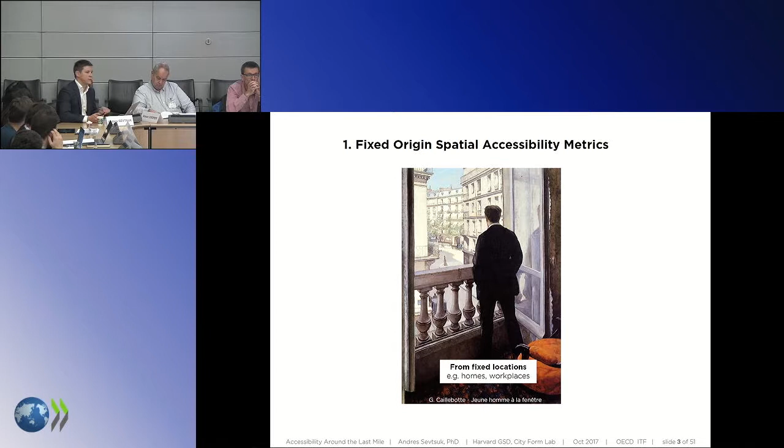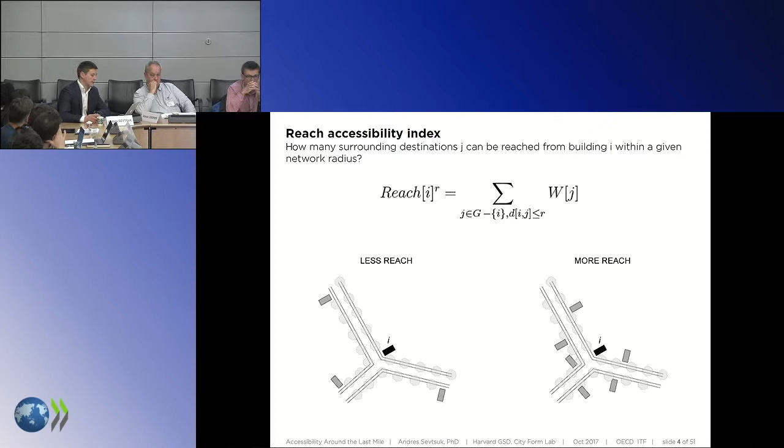I'll start by describing the fixed origin metrics, some of which have been measured and mentioned in the previous sessions already. Something like a cumulative opportunities index, which simply counts how many destinations we can get to, would, for instance, quantify how many destinations of any character are found within a certain walk range or transit time range. So this is, for instance, how many households or how many buildings, to be precise, are around a certain destination, like a coffee shop in an urban environment.

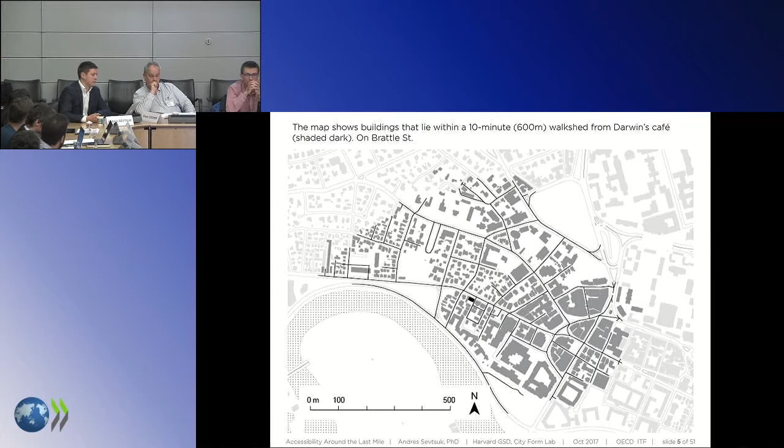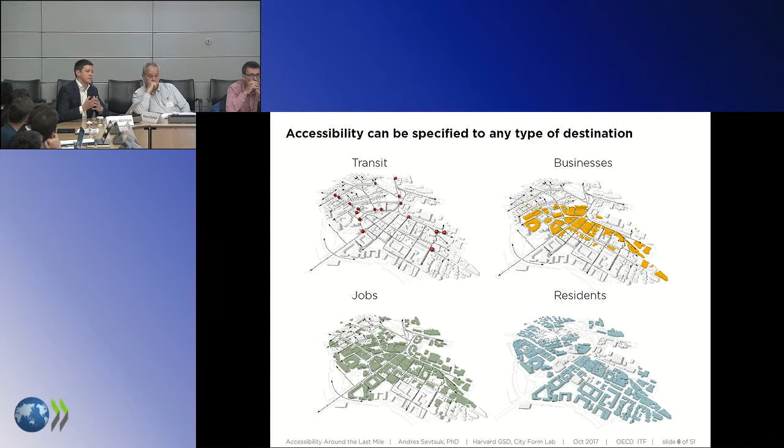This can be expanded to any type of destinations, of course. We can measure cumulative opportunities access to transit, businesses, jobs, residents, businesses of a particular type, residents of a particular type, and so on. And we can do it at all scales.

In this map, we use a cumulative opportunities index to measure across the United States, in all cities, how many people are found within a walk distance of a retail cluster. We did this analysis in all cities using all retail clusters around the country, and for instance detect that in New York City, across 5 boroughs, 88% of the population is within a kilometer of a retail cluster, and the cluster here is defined as an agglomeration of at least 25 stores.

And if you're in Memphis, it's only 6%. On the map on the right-hand side, what black and white areas differentiate is areas that we consider to be urban versus suburban, and urban has a certain density cutoff.

With these sorts of indices, and as I think has been emphasized over and over again, what's really attractive is that they're very easy and clear to communicate. It's very easy to tell somebody that, look, 88% of the population in the city is within a walk range, and the walk range here is 1 kilometer or about a 15-minute walk.

This could lead to really interesting policy applications too. So for instance, we did the same analysis for transit access across the entire United States, and we found that across the US, only 7% of the whole population lives within a walk distance from a transit station. This only considers rail transit, so it doesn't consider bus. At the same time, about 15%, or double that rate, is next to a retail cluster within a walk range.

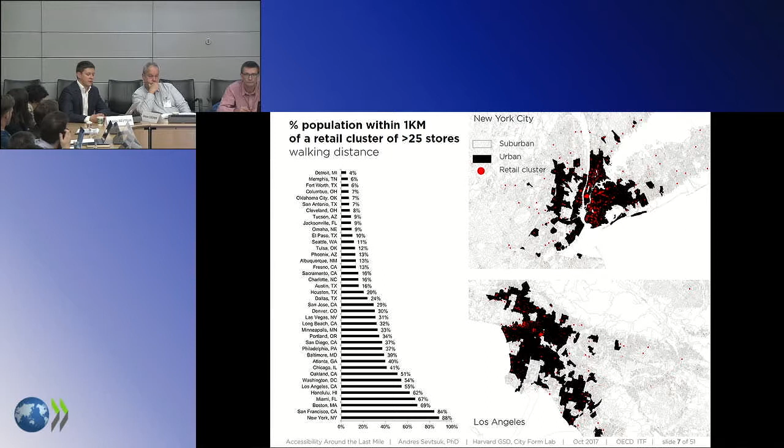So it kind of evoked this idea of amenity-oriented development, where in places in suburban areas, especially where transit is lacking and nowhere in sight to be built, could we use this idea of trying to incentivize development to be close to amenity clusters, such as retail agglomerations or mixed-use service agglomerations, as a benchmark to incentivize more development around those. This slide also shows the cities that perform well or low on this axis.

To calibrate such an index, you generally need origin points, destination points, optionally weights to describe what the destinations are, and some sort of a search radius parameter. The gravity type accessibility indices invented by Hansen in the 1950s are extremely popular, and I would argue somewhat more precise if we really want to talk about the notion of accessibility, because they also take into account the travel costs of getting to the destination.

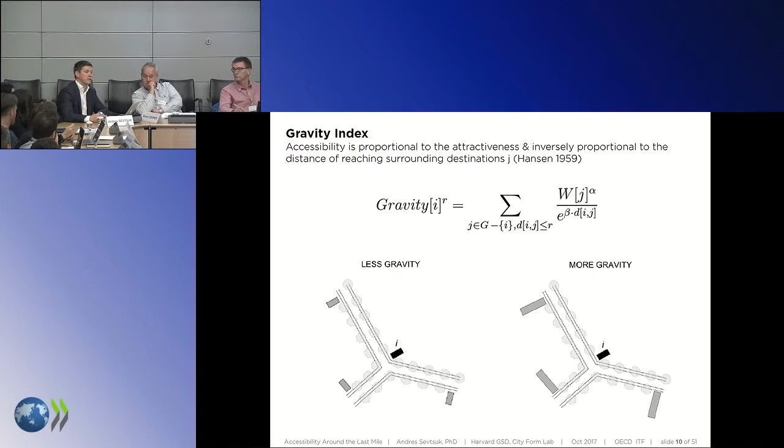So the destinations that are next to us are weighted much more importantly than the destinations that are at the edge of the search radius we're looking for. Of course, the downside is that the result is a ratio and an index that's very hard to intuitively explain to a policymaker. What does it mean to have an index of 0.75 versus 200 jobs within a 5-minute walk?

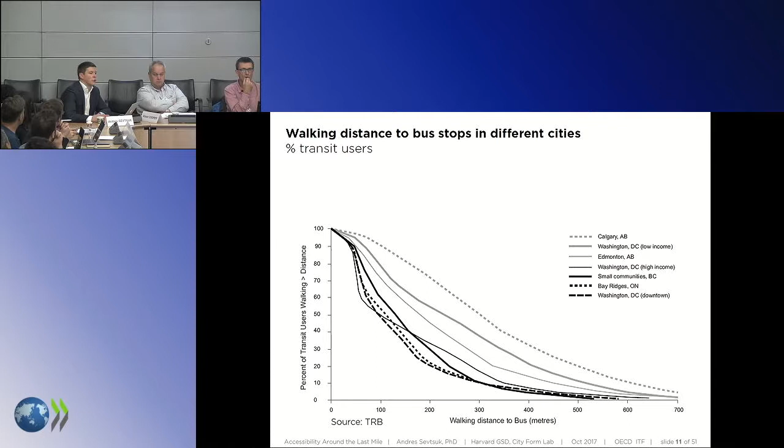And in different cities, the decay rate that is applied in the gravity metric can differ. This graph here shows a TRB study where they measured the percent of people walking to transit in different cities. As you can see, the decay rate differs by type of city, but also by income. The top line is, for instance, Calgary, and the solid black line is, for instance, small communities in British Columbia. People are more sensitive to longer distances there.

But we can calibrate this empirically by looking at a travel survey in a town, or conducting a small survey at transit stations and asking people how far you came from, and get a sense of what the distance decay rate is for that town.

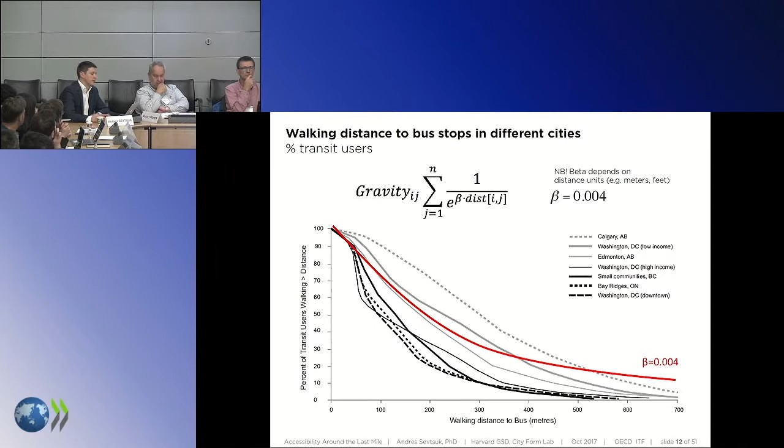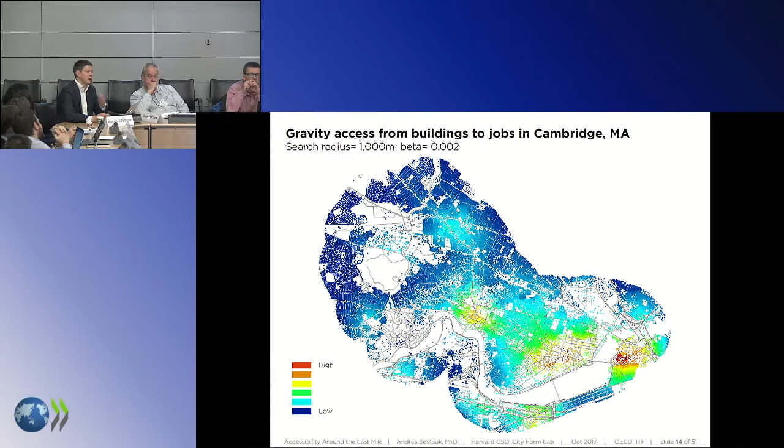We can do the same thing for access to jobs, for instance, and we detect from every building how easy it is to get to jobs in town. This affects also the likelihood of people who live in town to walk to jobs. In Cambridge, the mode share of walking to work is actually very high—it's around 30% of people who actually walk to work rather than riding transit.

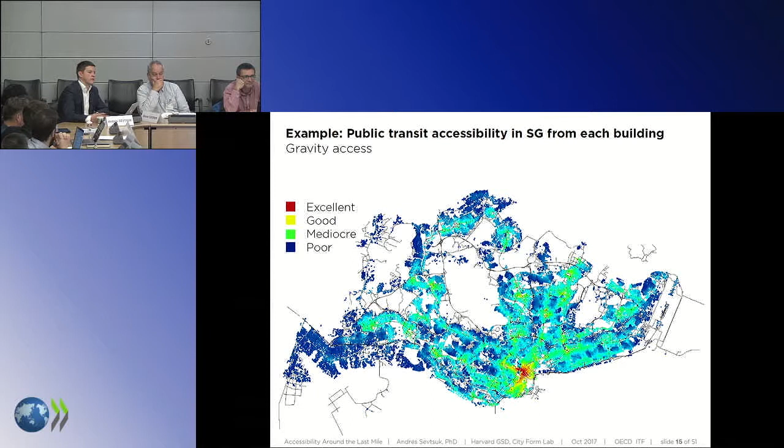This is another example of citywide transit accessibility at the individual building level. This is in Singapore, where there are considerably many more buildings, and we also weighted the analysis by the level of service at each transit stop. And this, again, can be done for each address point individually.

Now, the user inputs for gravity metrics again require origin points, destination points, optionally weights to describe the destinations, a search radius, but also on top of that, a distance decay parameter beta that tells us how the likelihood of going to destinations drops away with distance. And this needs to be empirically calibrated.

What I'd like to first emphasize before moving on is what are the key planning and built environment features that affect either of these metrics. I've talked about the cumulative opportunities metric and the gravity metric. So what could make a difference in upping that metric in different environments? First, if it's cheaper or easier to move to the destinations, if we have transportation options available from a building to a destination, we can access more destinations, as I think Simon's presentation very clearly demonstrated in London.

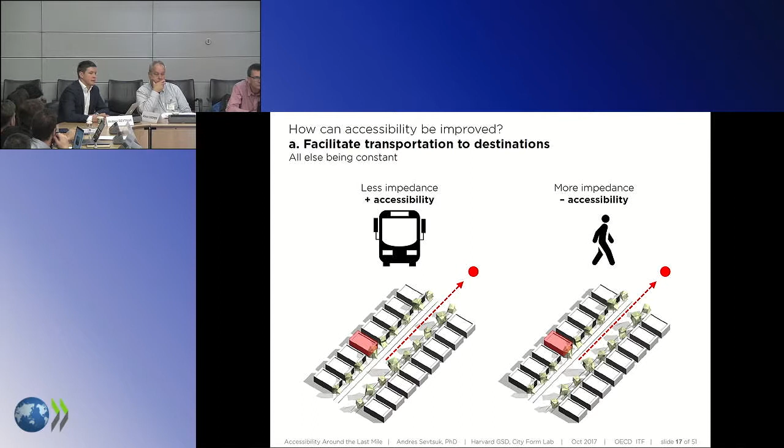But there are three other ways of increasing accessibility. If we increase the density of destinations around the locations, the index would naturally also bump up. If we increase the capacity of the destinations around the location, the index would similarly bump up. And finally, irrespective of the mechanized modes of transportation, if the built environment were more connected around us, then we get to more destinations.

If you have a hospital on a highly connected street intersection where many streets lead to it, it has higher accessibility than if it's in the middle of a block, irrespective of mechanized transit modes. We can sometimes see a 50% difference even within neighborhoods—corner properties render access to about 50% more people than properties in the middle of the block.

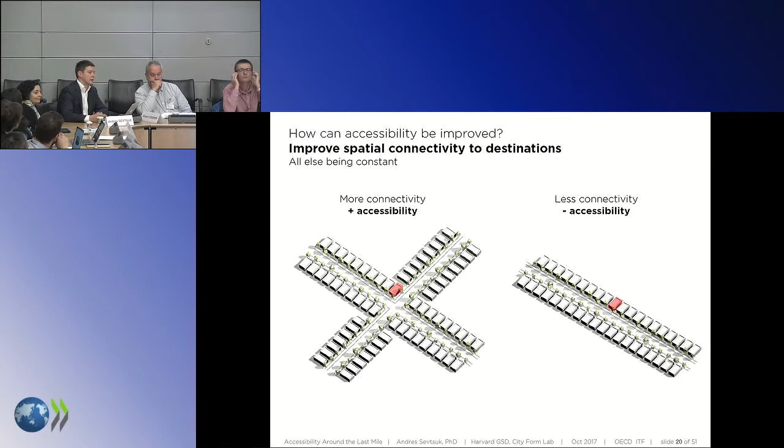But then there's the question of how we'd measure accessibility to destinations if we no longer assume people come from a fixed location like a home or a job. How could we take the attribute weights of those origin locations and simulate people moving through a city? Transportation modelers have long tackled this, simulating every person as moving through a city during the day, engaging in activities from any point along those trajectories.

But in accessibility studies, this is oftentimes ignored. Most of the time, we assume people come from homes, every once in a while from jobs, but not very often while moving around the city. So we've tried to tackle that by introducing new tools in the urban network analysis toolbox that help model accessibility at the pedestrian scale.

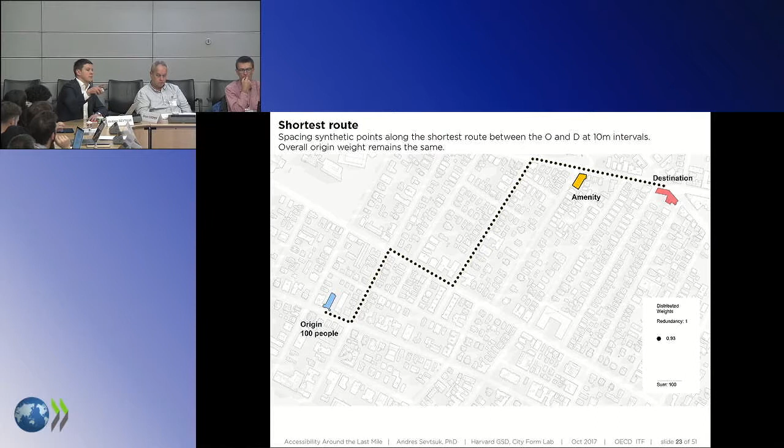So we've proposed a metric based on the betweenness centrality index known in network analysis and graph theory, to redistribute weights from origin points to destinations to simulate foot traffic on streets at the pedestrian scale. We don't assume people necessarily walk the shortest path, which actually turns out doesn't happen very often—pedestrian studies find we often take longer routes, around 15-20% longer than shortest routes.

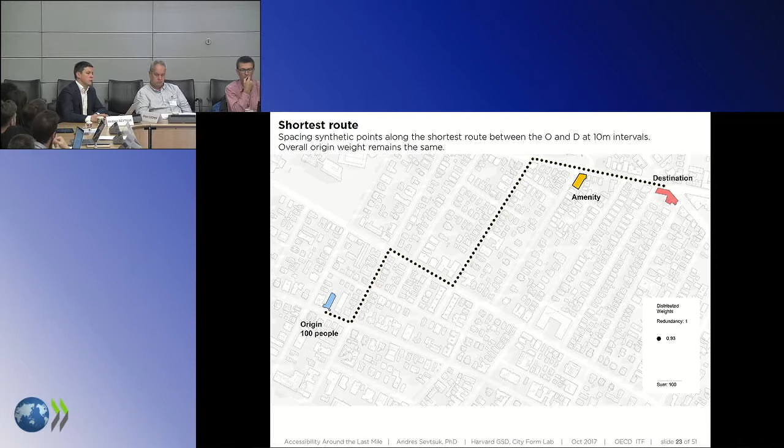So the tool we developed also allows us to model all probable routes. If we have, say, 100 people starting at the origin, the same 100 people finish at the destination, but along the way there's a different probability distribution of which routes are more likely. In this case we assign equal probability to every route, but since segments overlap—about 64 routes here—those overlapping routes attain higher probabilities.

We take the weight of the original building, which is 100, and every point along the way gets a fraction of that weight, such that the sum across all points still equals 100. So we're not inflating the number of people assumed to be on streets—we're simply redistributing it from one single point to many points on streets to simulate that effect.

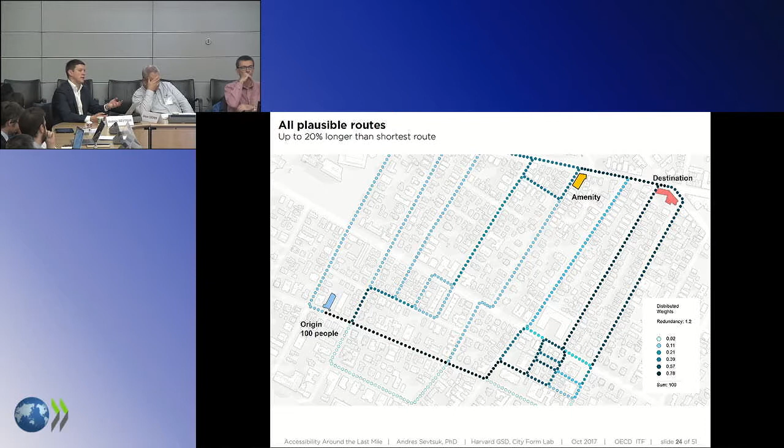This is a way to model lots of trips in an urban environment from certain locations—like going from tube stops or subway stops to office buildings in the mornings, or from offices to subways, or subways to homes in the evenings, or daycares, and all sorts of different trip destination matrices.

To do this weights distribution, we need origin points and destination points. Optionally, we weigh the origin points—for instance, characterizing how many people start those trips. Then we have what we call observer points, distributed points on the network that capture the weights redistributed from the origins. And of course there's a radius parameter, which can be scaled up.

So I'd like to use this opportunity to demonstrate how changing the assumption of where trips start can change how we plan things in a city, and what seems like a reasonable proposal for facility locations.

The first example comes from Singapore, and I'll show you a second example from a context of Indonesia. This project was a collaboration with the Singapore Housing Authority, where my lab, the City Form Lab at Harvard University, was involved with developing a new planning norm for commercial facilities in Singapore's housing towns.

The housing authority, because they're so vast—in Singapore about 83% of the population lives in public housing—therefore also has to cater to commercial needs. So they actually plan commercial environments as much as they plan residential environments, tackling the problem of how to do that, where to put them, and what typologies of buildings to propose.

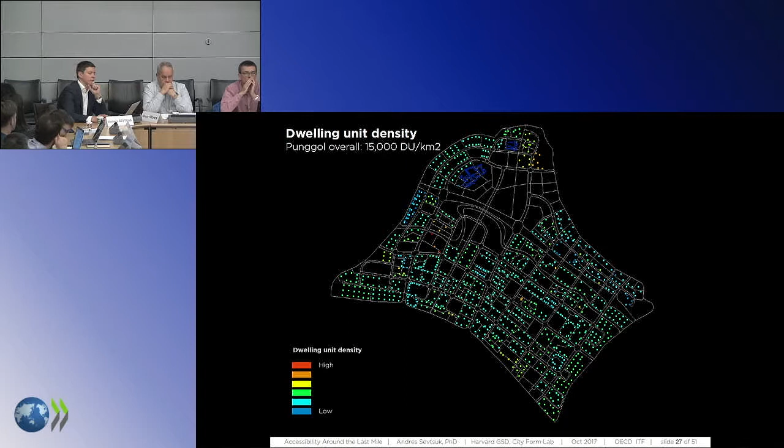This town has about 300,000 inhabitants. It's a big district of Singapore called Punggol. The transit stops fall into three categories: there's one single metro stop in that area, light rail stops, and bus stops, which are blue. Light rail is green.

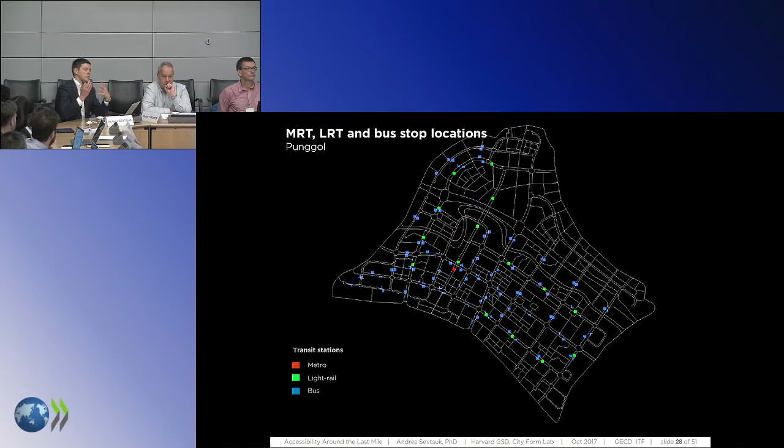We calibrated a model that applied a certain probability to households to walk to each of those destinations depending on what was available around their house. So if the tube stop was available close by, most trips would go to the tube. But if there was no tube stop within, say, an 800 meter cutoff, trips would be allocated to light rail or bus. The balancing was based on an assumption matrix of how many trips would go where depending on how far these destinations are.

That essentially led to an estimation of the same 300,000 people in that town, now visualized or mapped according to their daily commute trips. In Singapore, 84% of the population uses public transit to get to work, so it's the most important travel mode, and these trips can be assumed to happen across different social groups.

Now, if we think that these are our origin points for planning facilities rather than the home fixed locations, we actually come to a very different plan for planning the facilities. If we don't put the retail centers, the food courts, the convenience stores into locations necessarily right next to people's homes, but rather right next to where they walk on a daily basis, it turns out we actually capture much more demand.

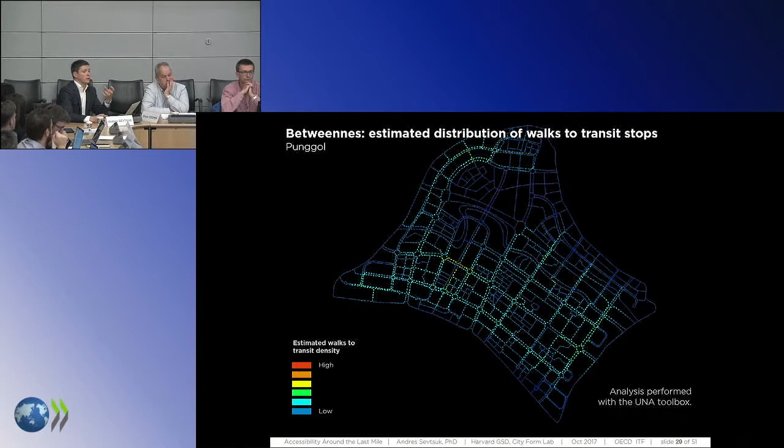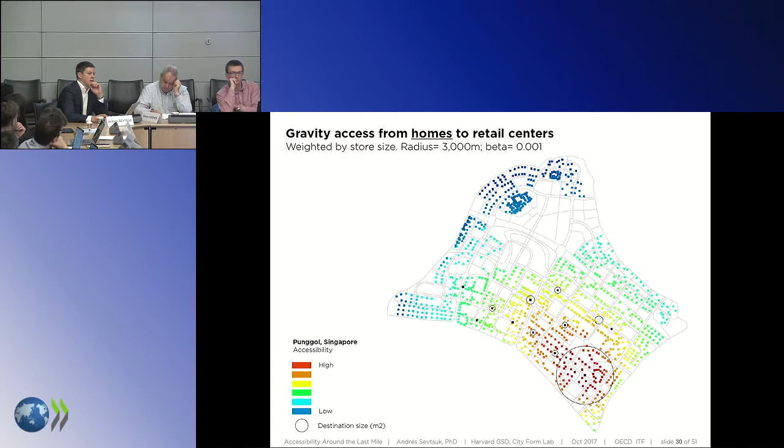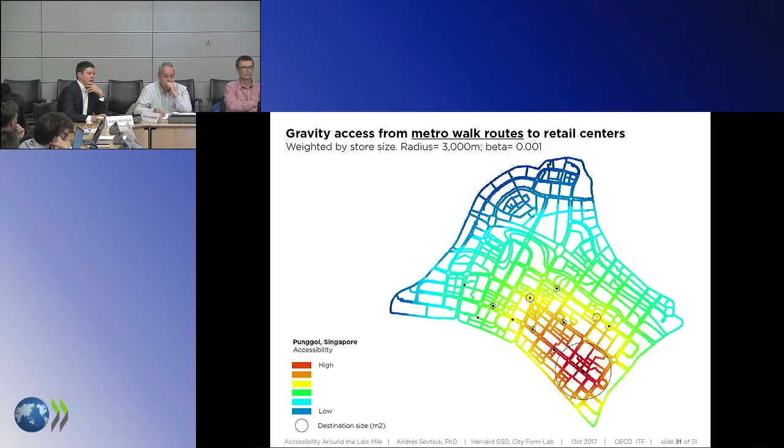If we actually looked at a related model where we use the accessibility indices to estimate how many people would visit what facility, this here is the current built-out locations of retail destinations in that town. Every black circle is a retail cluster shown by square meters with the numbers. And we use the Huff model here.

For those unfamiliar, the Huff facility patronage model is entirely based on accessibility. It's a ratio between the accessibility of one destination divided by the accessibilities of all destinations, and that creates a probability of going to that destination. So each destination gets a certain probability, and all of the demand is allocated between the destinations.

If we use the current model—I'm sorry, these numbers actually are not the sizes of the centers on this slide, but they indicate the number of estimated visits to centers, assuming that trips start from homes—the total sum of visits under that assumption is about 33,000 trips during a certain period.

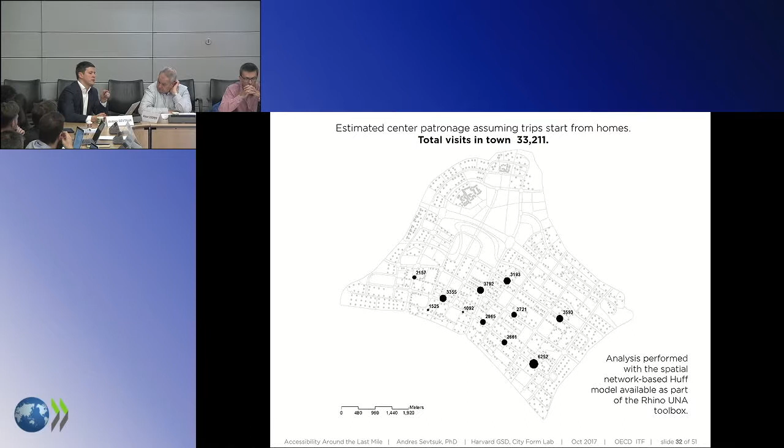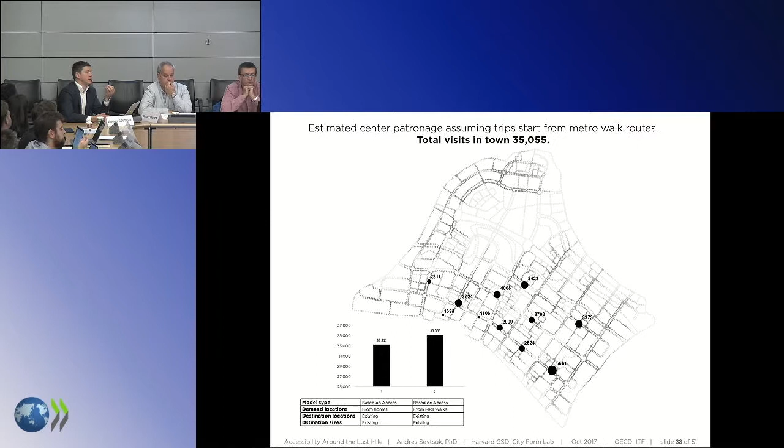Now, if we just change the assumption to model when the same people might make the trip on their walks to transit stops instead, we get a higher result: 35,000 trips going to stores, simply because the stores appear more accessible to them on their walks to transit stops rather than coming from homes. This enforces the point that changing our assumption about where trips originate can also change the accessibility results and therefore alter how many people we expect to actually patronize urban amenities.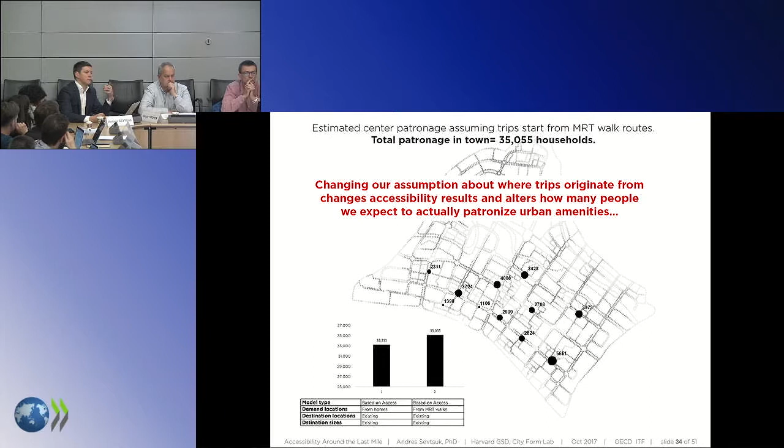So not only can the results change by bringing amenities closer to people, but also by assuming from what locations people engage in those activities—when they decide to go to a particular destination, in this case a retail cluster.

We developed a scenario analysis for a town that was about half built during this study. The authority, the HDB of Singapore, already had a plan for full build-out of commercial facilities, and this is their full build-out proposal.

We asked: if we assume people could make retail trips not from home but during their daily walks to the MRT stations, would that change where you'd place future facilities, rather than keeping them where originally planned?

We discovered that by optimizing the locations of these facilities, putting them closer to the walks, we could in the full build-out substantially increase estimated store visits by about 10%. This could both improve accessibility for people and make more stores viable, since they'd likely get more visits daily.

There were proposals to move away from the single-building destination model. The HDB is currently planning retail centers as single-building malls you walk to from home. Instead, we proposed lining streets with commerce along daily walks to the MRT stops, distributing it along streets as a different typology.

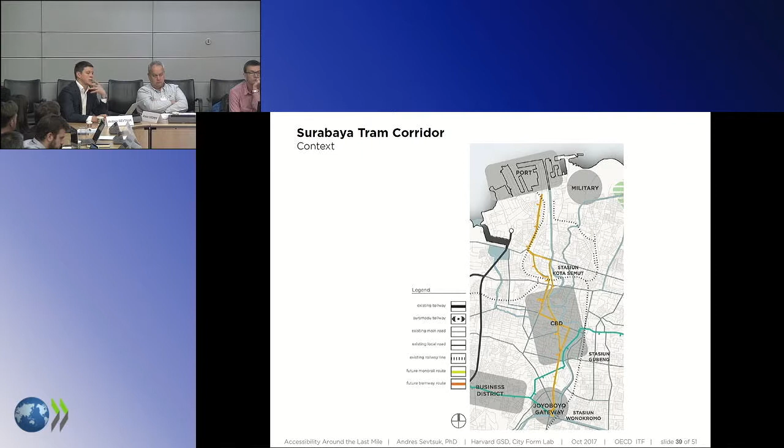We used similar tools: analyzing population density around every one of these stops, at the census block equivalent level in Indonesia, called RTs in the local context.

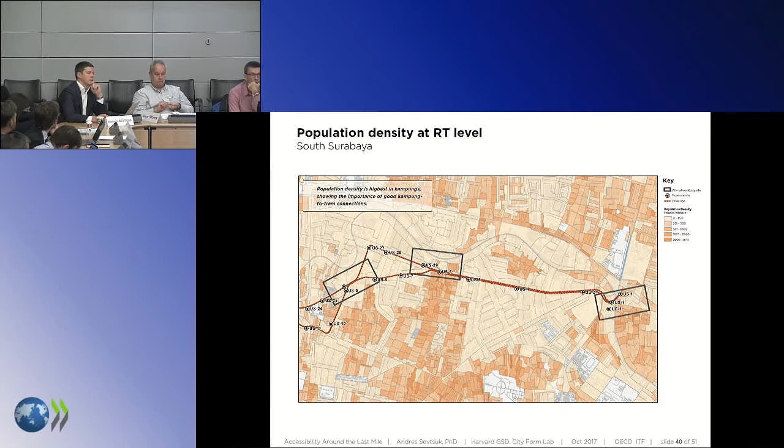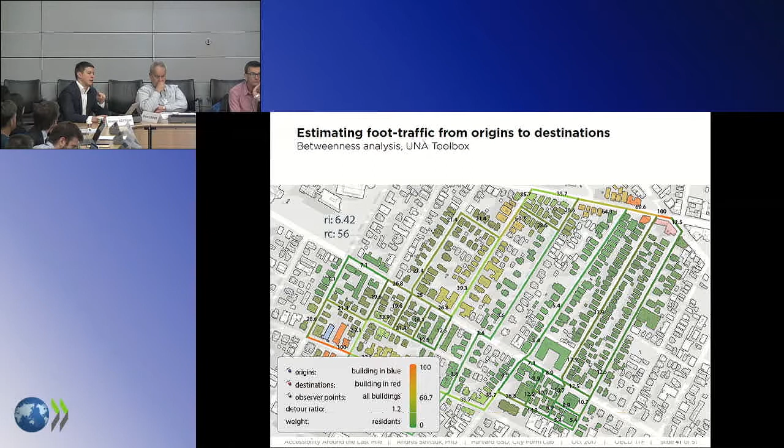We used a similar approach as before for routing trips from homes to stations—a probability distribution as people move through the environment, coming from a certain home to their nearest station, not just the shortest route. We did this across several thousand census tracts, detecting which street segments would be most critical for providing access to the proposed future tram system.

We argued it's absolutely vital those streets be in good shape for the system to work. When I say 'in good shape,' we come from a very different standpoint than in Paris or London—in Surabaya it's customary for streets to flood when it rains.

There are generally no sidewalks. What we discovered in the demand analysis was that the most likely demographic for this new transit line would be women and children who don't have cars or scooters. If you have a car in Surabaya, you probably drive it—it's a status symbol as much as a transportation device—so those who don't generally are women and children.

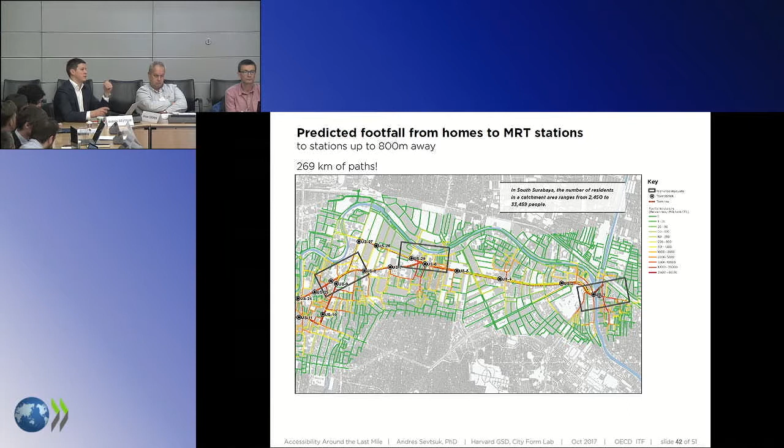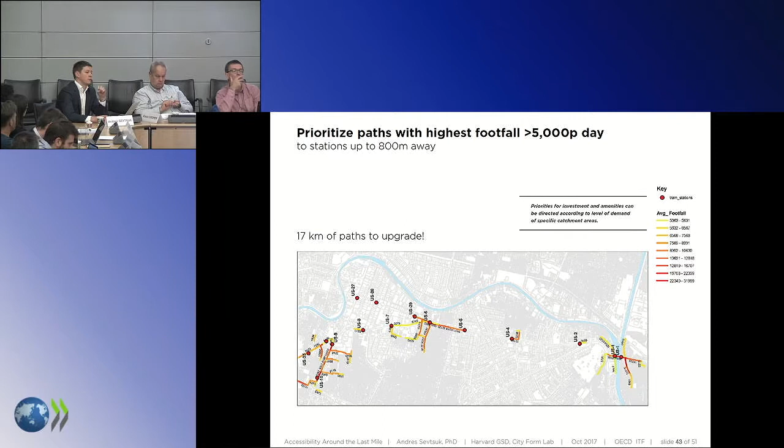Those are especially vulnerable groups for accessing the tramway. For instance, if you go with your child on the tram and the street is completely flooded with two feet of water, there's no chance the system attracts much ridership. From the full analysis, we filtered out the segments that were absolutely critical, with the highest estimates of pedestrian footfall for getting to the stations, and proposed an improvement program on top of that.

But before I showed some of the improvement slides, I wanted to mention, once we have an estimate for how many people we think are going to use a segment per day or per hour, this number is somewhat abstract to policymakers oftentimes.

So what does it mean that we have 250 pedestrians per hour on a sidewalk? Most people don't really know what that feels like. So we developed a related tool, which we call a street catalog, where we filmed with time-lapse videos streets around the world and measured their pedestrian densities, and also provided some general indicators of what's around there with accessibility indexes, such as how many transit stops, how much density, how many jobs are around these streets, to give some context to what we're seeing.

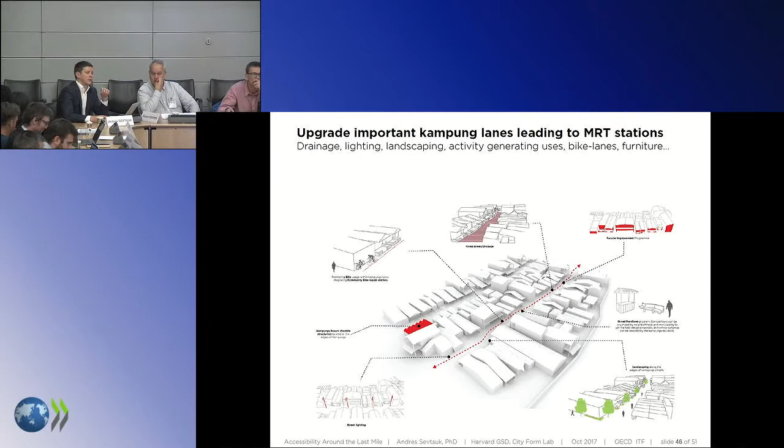And so along the same lines in the Surabaya project, for those links that were deemed as the most important future walk routes to the planned transit stations, we proposed that the city initiate a series of upgrade projects ranging from putting in better paving, bike lanes, rezoning some of the properties along those to have active street fronts, street furniture, landscaping, drainage, lighting, and so on.

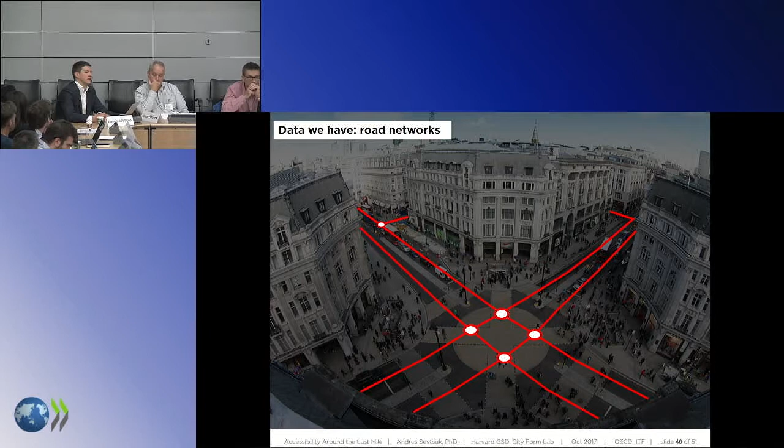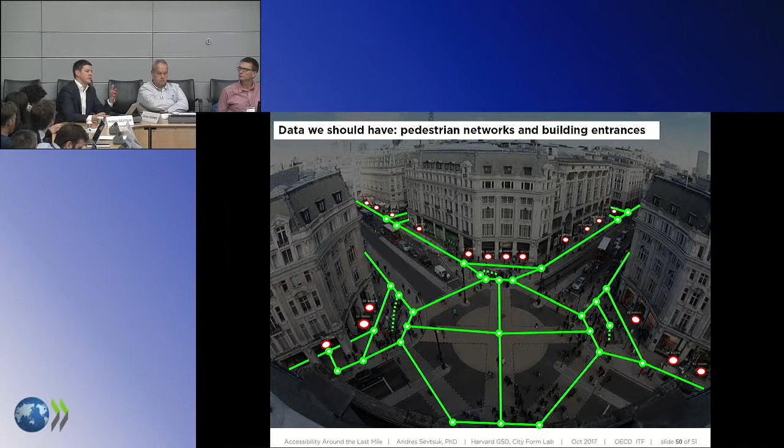But the things I've been talking about are entirely outside of this data. They're here on the sidewalks and around the amenities and destinations that are along those sidewalks. And a lot of cities, in fact, the vast majority of cities, do not maintain a database on sidewalks, but simply assume that pedestrians walk along road axes. So we oftentimes end up surveying this data ourselves, but this is not scalable. For us to really implement pedestrian-scale last-mile modeling in cities across the country, we need a more institutional approach to data collection.

And furthermore, we need to know a little bit about what happens on those streets. So we recently started a pilot project at Harvard in collaboration with the engineering school, where we're trying to use computer vision techniques to describe what happens on sidewalks. Rather than simply counting how many cars a street has, which is the number that most cities will bring to a policy discussion about what should we do with the street, the street has 1,000 cars per hour.

Could we use computer vision techniques to actually measure what happens on streets in totally anonymous ways, just simply by feature recognition? See how many pedestrians were on the street, how many people were standing, talking, or pushing a baby pram, how many cyclists, and also including the traffic measures of buses, trucks, and cars. This is entirely feasible. There's a commercial company out there already doing this, but cities sort of have not fully adopted it.

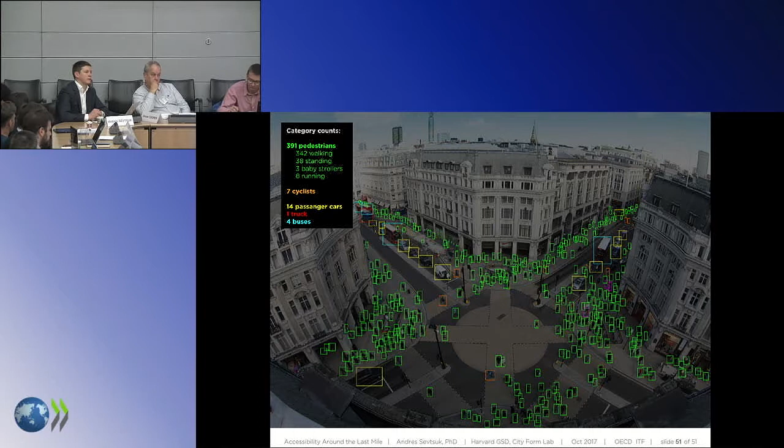The data would be extremely valuable for pedestrian level analysis to understand what actually happens on those sidewalks and streets throughout the day. And that could be major for policy input as well.

If we look at a country like the US, we'll have excellent road network data. The census collects it, called Tiger Road Networks, and you can go and download it for any place. It's detailed with lots of attributes. We don't have the same for sidewalks, and many cities are starting to realize that.

For instance, Denver has been going through a big effort to become a more pedestrian, less car-oriented city, and they think a major barrier towards that vision is really the lack of data. The city can't improve its walking network if it doesn't know where the weaknesses are, and yet no city department has any inventory of sidewalks or crosswalks.

I think this is actually a fairly low-hanging fruit worthy to pursue for cities to start doing mapping of sidewalks. It's actually being done by grassroots organizations now. There's crowdsourcing platforms for collecting sidewalk data.

And of course, we need to come up with a certain standard of how this needs to be documented. And I would also think that if OECD helped make a suggestion to cities that this is good, then I think that would be extremely helpful to a lot of pedestrians around the world.

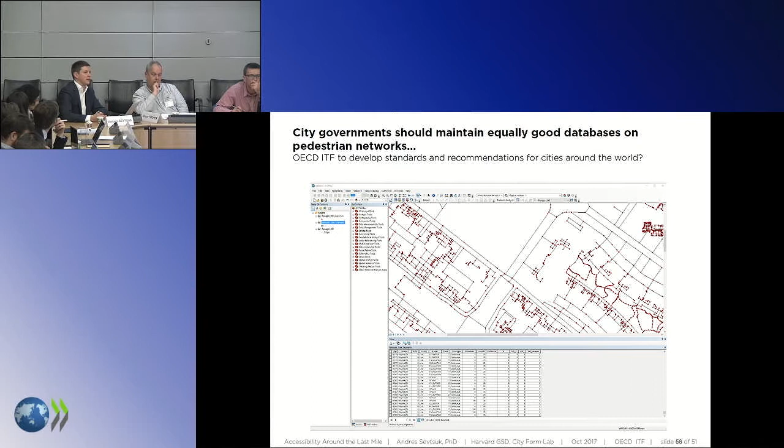There's, for instance, the city government of Singapore, we managed to convince, is now collecting pedestrian sidewalk data and overpass and underpass data, they're officially putting it together. But I think it would be great to do it at large.

So just a couple of conclusions. I started arguing that most of the accessibility indices assume trips coming from fixed locations, generally homes, but that's not oftentimes the case, especially in big cities. We have very complex trip chains, and oftentimes we engage in activities not from a fixed location like home.

So therefore, we probably also should not be planning amenities in the cities just to be close to homes. Changing that assumption will change where it makes sense to place facilities. It actually leads to a different result when we assume origins to be different.

And when talking about pedestrian accessibility at that sort of last mile scale, it's important to start focusing on streets and their attributes that we actually don't have. So having data at the sidewalk level.

Simon was earlier touching upon the question of step-free access to buses in London, and we briefly chatted afterwards, but I sort of highlighted the point that we might have a step-free bus, but the walk to the bus might not be step-free. And we don't know that if we don't have pedestrian-scale data.

If it involves going down steps and up curbs, and there's no way you can roll a wheelchair through that, or sometimes even a baby pram. So needing pedestrian sidewalk data also requires some of these attributes.

We really have to be very careful to observe level changes in that data. And I again would love to talk to OECD about coming up with those standards and making those recommendations to cities.